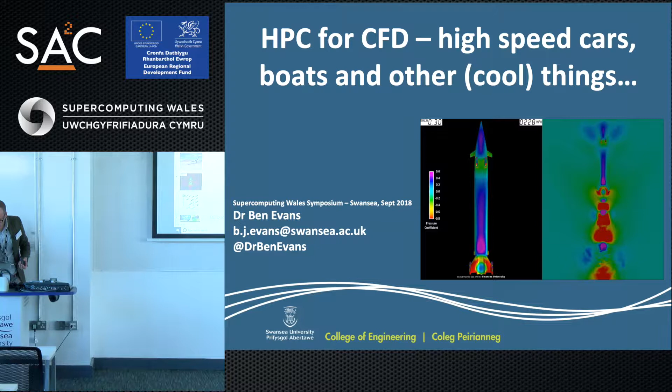So now we have Ben Evans, who is talking about HPC for CFD. Yeah, how are you? Hi. Good. Morning, everyone.

These guys from SA2C, by the way, they're really, really good. If you've not engaged with them at all, you should. I don't know why I'm advertising this, because the more people that engage with them, the more demand there's going to be on your time, inevitably. They've done some bits and bobs with some of the work that I've been doing, and over the last 6 months we've managed to get some of my code to do things I could have only dreamed of achieving myself, or it would have taken several PhD projects to get to the point where they're doing what they're doing now. So I do really recommend engaging with them.

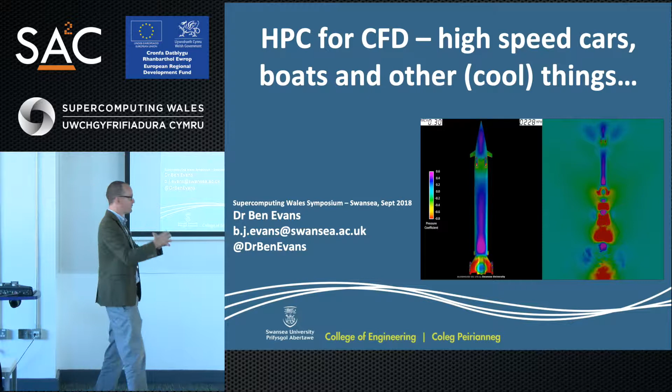You'll notice I added the word 'cool' into the talk title: High-speed cars, boats, and other cool things. I found preparing for this almost like a therapy session, because a lot of the work I do sometimes feels a little bit disparate, and I tried to bring it all together into one PowerPoint presentation, which was quite therapeutic. Then I looked back at all my slides and thought, you know what, some of the stuff I do is quite cool. So I added the word cool into the title.

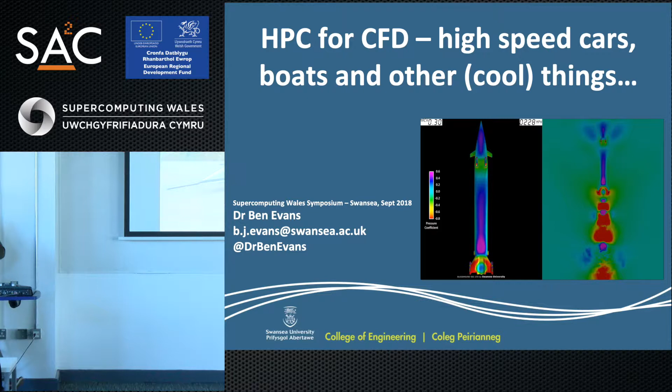This picture landed on my desk about a decade ago. I was wrapping up a PhD in computational fluid dynamics. The work I was doing then was looking at molecular descriptions of gas flows, mathematically via an equation called the Boltzmann equation, and trying to figure out if we could solve this using finite element methods. Honestly, if back then you'd asked me what HPC is, I wouldn't have really been able to answer that question. Jason Jones is smiling because he'd probably say I still couldn't answer that question.

But over the last decade, it's become obvious to me that I simply cannot do what I do without high-performance computing. This picture landed on my desk with a note attached to it. I was planning on leaving the university and going to get a proper job. There was a note asking me to go see my supervisor, Professor Ken Morgan.

It turned out that a chap called Richard Noble, an ex-land speed record holder, was the project director on the Thrust land speed record program, which developed the Thrust SSC car that holds the land speed record today. He got in touch and said, we're going to have another go at this—we're going to take a British land speed record car up to a target speed of 1,000 miles per hour. For the last decade this has been a joy, stroke the bane of my life, to work on.

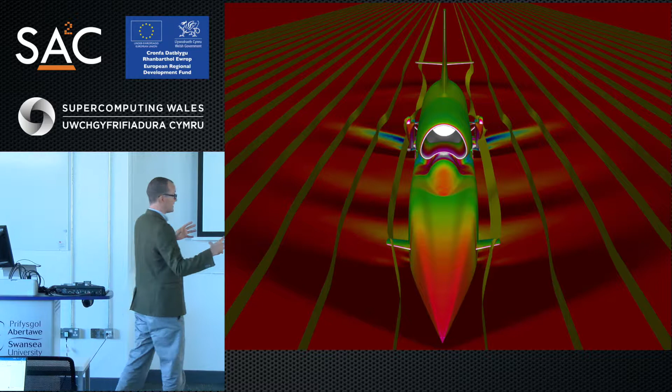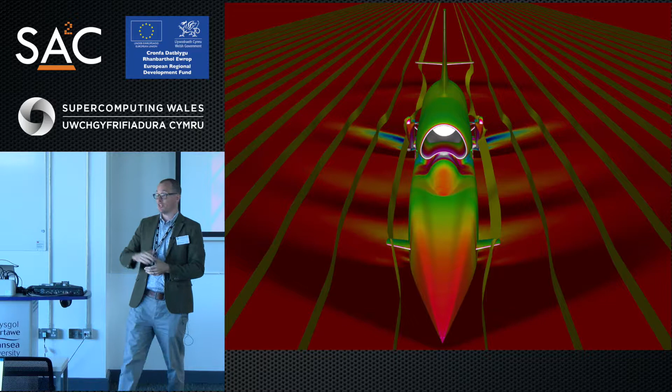The design for this car has been driven almost entirely using computational fluid dynamics. Whether a land speed record vehicle is successful is almost entirely driven by the aerodynamic forces acting on the vehicle. There are other things to consider, but to get to the external packaged shape of the vehicle—the external geometry that drives the aerodynamic response—you need to understand the aerodynamics: how much lift or downforce acts on the car, how that varies as a function of the vehicle's speed or Mach number, and how much drag will be acting on the car.

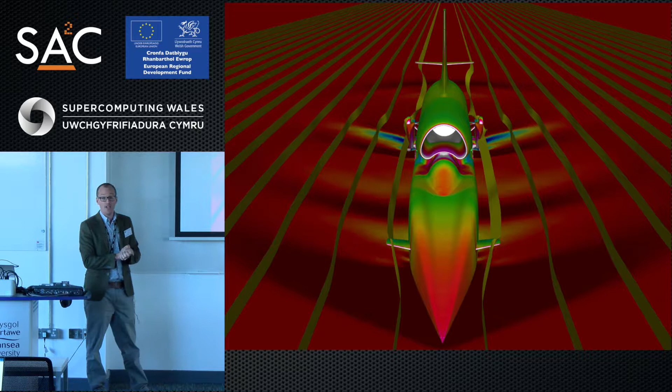We went through a process which started all the way back in late 2007. First, trying to answer the question: is it even physically possible to take a vehicle of this sort along the surface of the Earth at 1,000 miles an hour? Can that be done? And second, if it can be done, what shape should that vehicle look like?

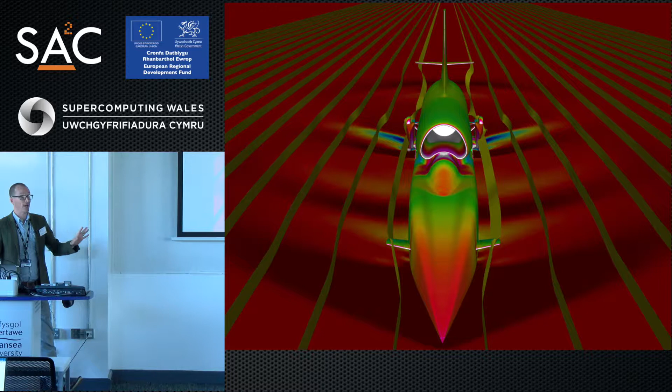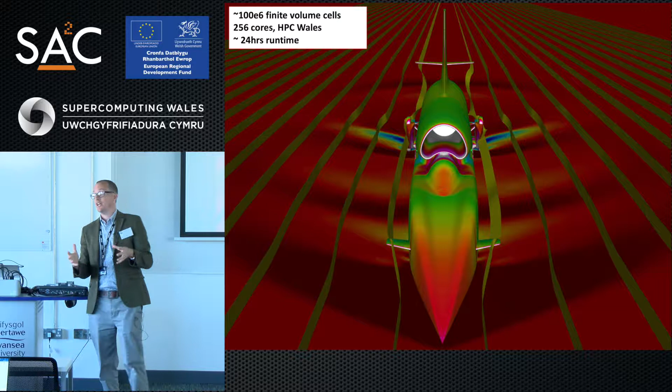That process was driven by CFD. I'm not going to put any equations up, just a few bits of stats since HPC people are interested in this kind of thing. The simulations we're running are RANS-based, so based on solution of the Navier-Stokes equations in their Reynolds average form. They're time averaged, which requires you to use turbulence models to understand what's happening at the subgrid scale and at temporal scales smaller than your time steps.

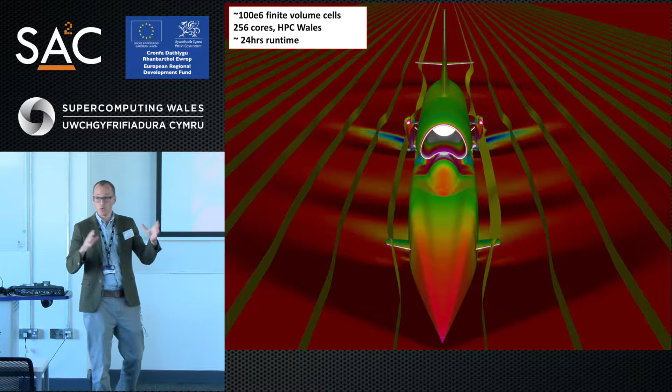To run a single steady-state CFD solution on a problem like this, on a grid size of the order of 100 million cells, would typically take about 24 hours to get to a steady, converged solution across 256 cores of the HPC Wales machine, as it was back when we were running these types of simulations. So there is no way we could have done what we did on Bloodhound without HPC.

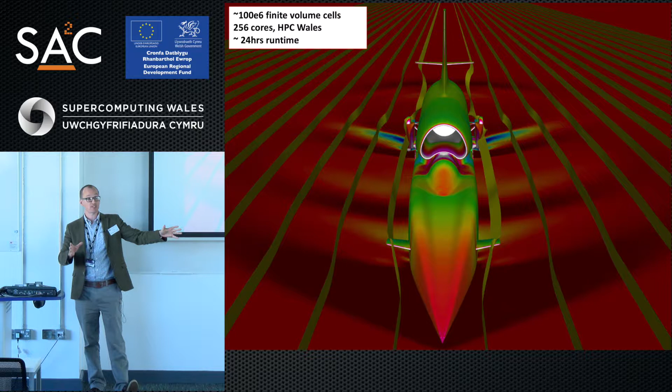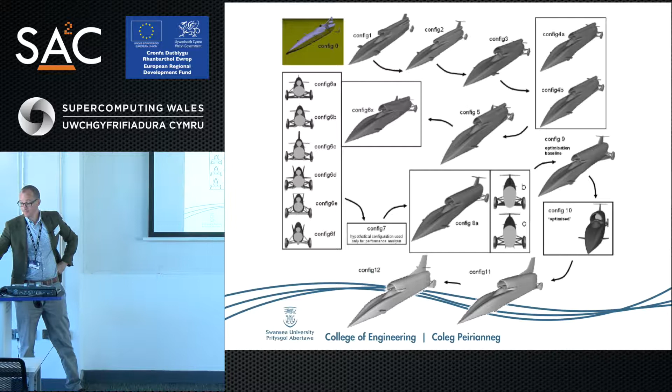And that's a single simulation of the car at a given Mach number, so a given set of free stream aerodynamic conditions. But we want to know how this car responds all the way down to, say, Mach 0.2, Mach 0.3, where it's traveling at maybe 200, 300 miles an hour, right up to 1,000 miles an hour. So what we do is we run a series of snapshots at different speeds to build up a picture of how the car behaves across the speed regime it's going to be running at. That information then feeds into the wider design cycle of the car.

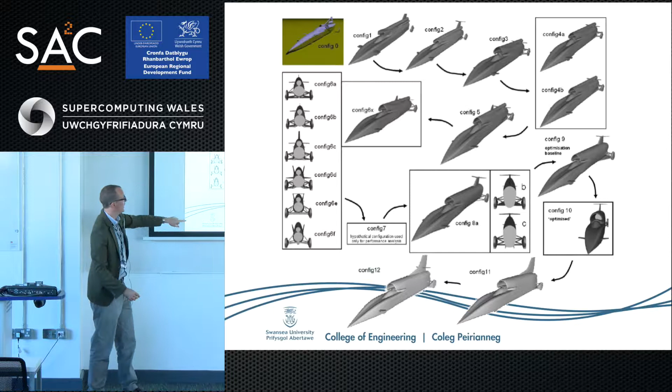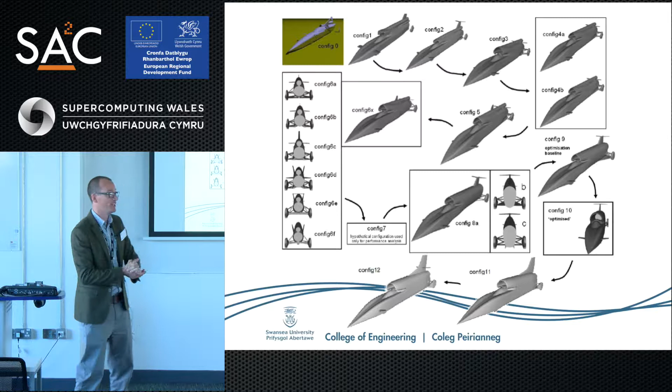So this is config 0, the first set of the geometry on which we ran the first set of CFD simulations a decade ago on that initial artist's impression of what the car should look like. It took us about 5 or 6 years to come round this loop and arrive at the car that we built, which is actually config 13. But Richard Noble has told me never to present a presentation where I tell him that the car we built was number 13, because some people get a bit funny about the number 13. So I always stop at config 12.

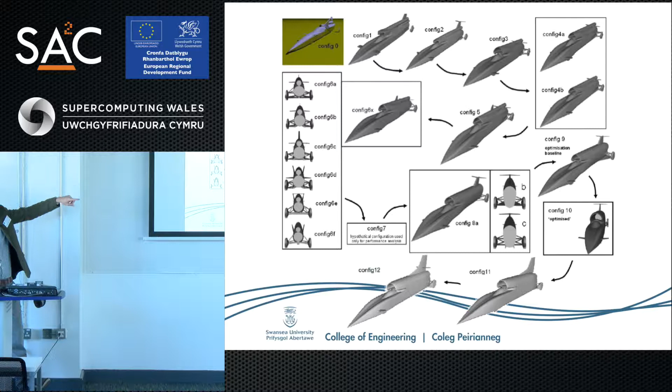Again, you can get an idea — at every point in this cycle, every time we change the car geometry, we're running maybe 20 or so of those 256-core, 24-hour simulations. A heck of a lot of HPC resources gone into getting us around this loop, and it took us about 5 or 6 years to get to that final design.

Once we'd nailed the external package of the car, we then started homing in on some other things that might have been of interest. One of the questions I was asked was: how are the air brakes on the car going to affect the flow downstream and the part of the car that sits downstream of these air brakes?

So just to give you an idea why we need the car to slow down — we're going to run this car on a 10-mile track. In the middle of the track, there's a mile where the average speed of the car will be measured, and we've got to get the car to average 1,000 miles an hour over that mile to get a 1,000 mile per hour record.

At 1,000 miles an hour, you're traveling a distance of a mile every 3.5 seconds. Imagine getting from here to somewhere a mile away — that will take you 3.5 seconds. Our track is 10 miles long, so at the end of this measured mile, where we're traveling at 1,000 miles an hour, we've got just under 5 miles to stop.

Actually getting the car to stop is every bit as challenging aerodynamically as getting the car fast in the first place. So we need braking systems — the drag of the car alone is not enough to get it to decelerate in that distance. So we open out these big barn door air brakes on the side of the car.

In a design meeting a few years ago, someone asked me: do you have any idea what the flow field looks like downstream of those doors? Now, of course, once you open big bluff bodies into flow like that, the flow you get behind them is really messy.

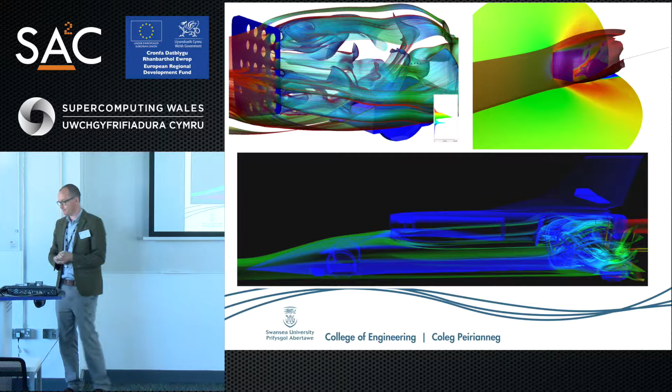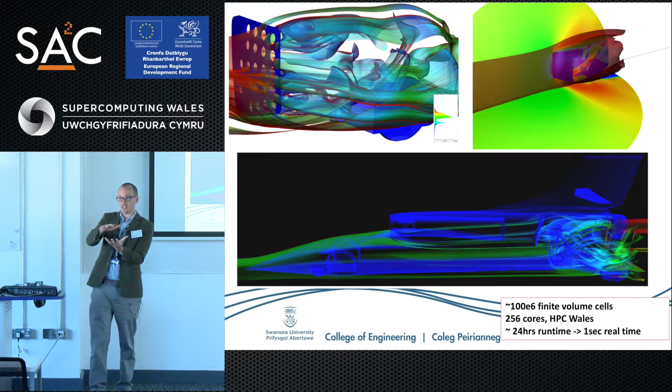They were interested in knowing what the vortex shedding frequency at various speeds of the car would be on those air brake doors. So we ran a set of simulations focusing in on just the air brake behavior. Again, a similar sized mesh, but this time running in real time, trying to pick up the time history rather than converge to a steady state. This is expensive, 256 cores. It took about 24 hours runtime to get about 1 second's worth of real time history at sufficient resolution to capture this vortex shedding.

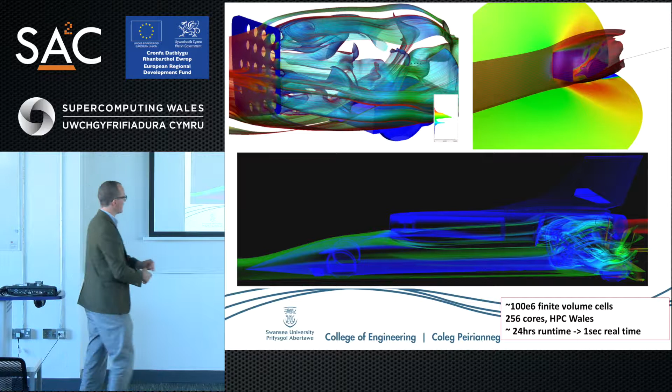I went back to the meeting and said the vortex shedding frequency of the air brakes as they first existed, just a solid door, is about 1 to 2 hertz typically. We turned to the structural engineers who designed the rear wheel suspension and fairing system and asked them roughly what's the resonant frequency of that system. They said 1 to 2 hertz. So we said, oh - I think we used a word I probably shouldn't say since this is being filmed. So we had to come up with a solution.

The solution eventually was simply to punch a load of holes in the air brakes. There was a small penalty in terms of how much drag they generated, but not as much as you might think considering how much less surface area there is now. What they ended up doing was instead of having very large, relatively low frequency vortices being shed from the air brakes, we ended up having lots of much smaller, but much higher frequency vortices being shed, which we hope is far enough away from the natural frequency of the rear wheel system not to shake it apart.

At the same time as all of this, I promised I'd tell some stories. So I was sat in a cafe down there, Callahan's. Is it still a thing, Callahan's? Yeah.

This is why I love universities. I was sat there drinking my coffee - it wasn't the drinking the coffee that's the reason I love working at universities - but someone came over to me from computer science and said, oh, over there's a guy I've been meaning for you to talk to for a long time, have you got a few minutes? So I said yeah, fine. And the guy's name was Matt Edmunds. Anybody know Matt Edmunds? He used to be a computer scientist, and then he saw the light and came over to engineering and worked with us.

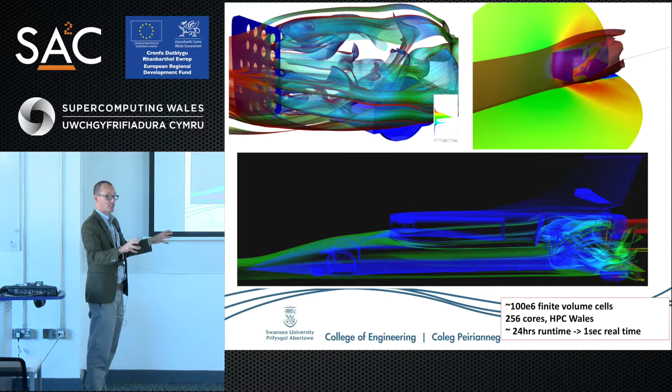He was doing a PhD on data visualization, and he'd been wanting for a long time to try out some of his techniques on CFD data sets. So he basically said, this is what I do, this is the data I would need, this is roughly the format I'd need it in, let's see what we can do. So I just sent him a download link to some of the data sets we'd recently run on this particular problem, and within an hour or so he was emailing me back pictures that looked like this, which I thought was really cool, because up until now generating flow visualization of my CFD data sets would be an incredibly manually intensive piece of work using software like ParaView or EnSight. You play around for ages trying to seed your streamlines or stream surfaces to pick up the phenomena you want. He had this capability to just load in a data set, look for the interesting features in it, and visualize it all automatically. We'll come back to that story later on.

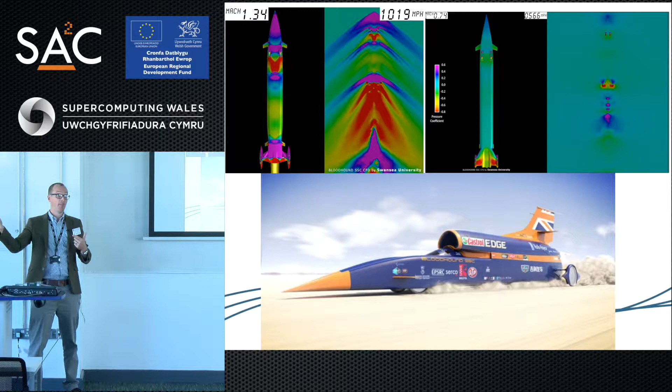So we're not just interested in what the air is doing to the car, but also what the air is doing to the ground that the car is rolling across. Thanks to Jason Jones, who produced these visualizations for me. What we've been doing as well is looking at the effect of, particularly when shock waves start being generated as we go through the transonic regime - by about Mach 0.8, 0.85 we start generating shock waves, which are these big purple things here - because what they found on the Thrust project was one of the problems they had is you've got to run the car back in the opposite direction, and it's the average of your 2 runs in opposite directions that gives you your land speed record.

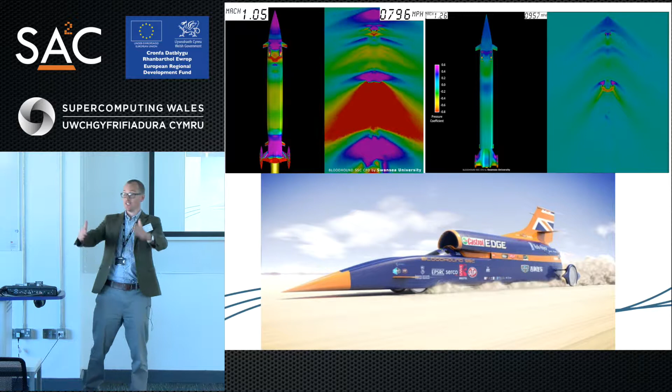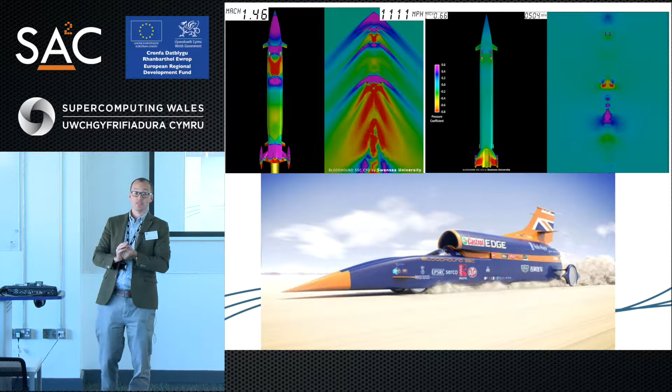The shock waves they were generating were actually pulverizing the surface that the car was running across, so by the time the car was running back in the opposite direction, the surface had been almost destroyed. And we're going to be running 30% faster than Thrust did. So we realized pretty early on this is going to be a big problem for us.

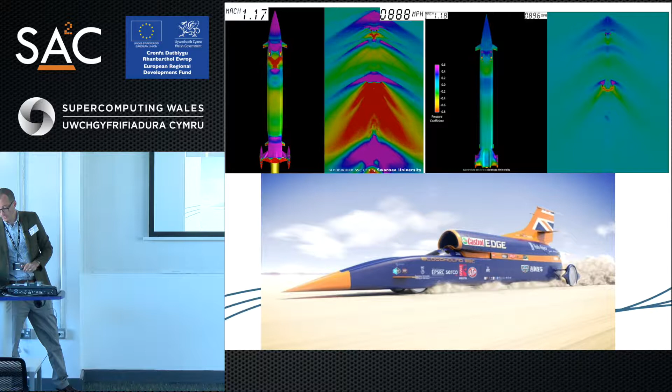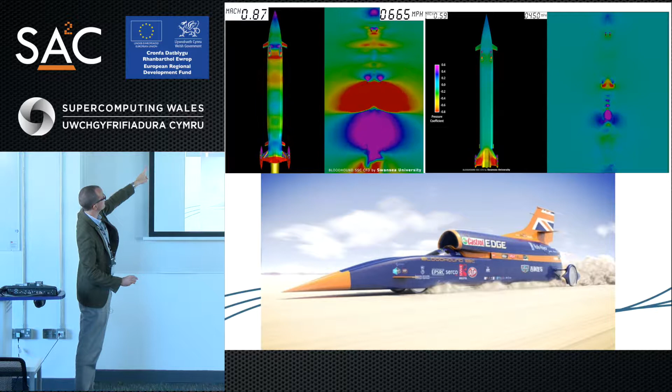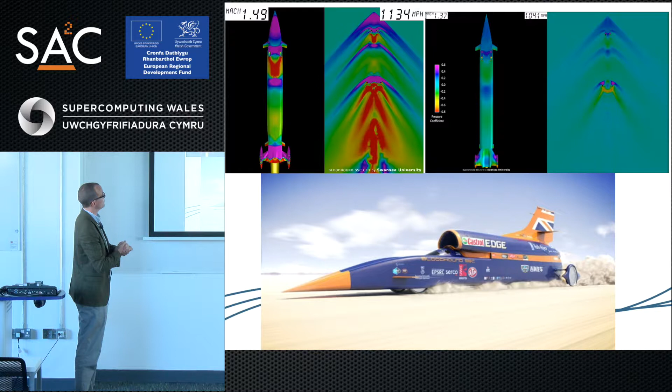So we specifically used design optimization techniques to get the underside of the car right. On the left-hand side is quite an early configuration of the car, the right-hand side is the current design, trying to minimize the impact of the pressure distribution generated by the aerodynamics on the ground plane. These are using the same pressure coefficient mappings, and you can see we did a pretty good job of minimizing the impact of the pressure distribution over the ground plane. This stuff down here, don't worry too much about that, because that's at a point where the grid has become too coarse to be accurately capturing what's going on.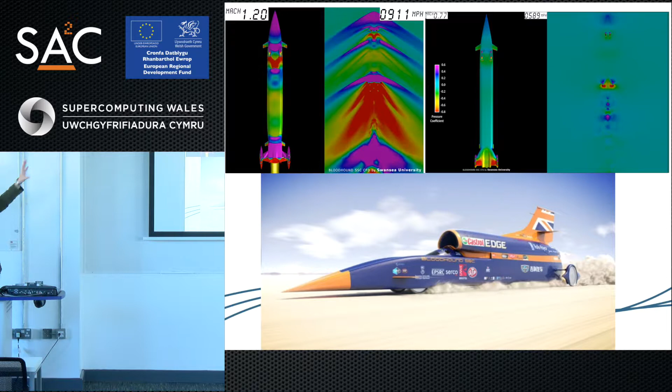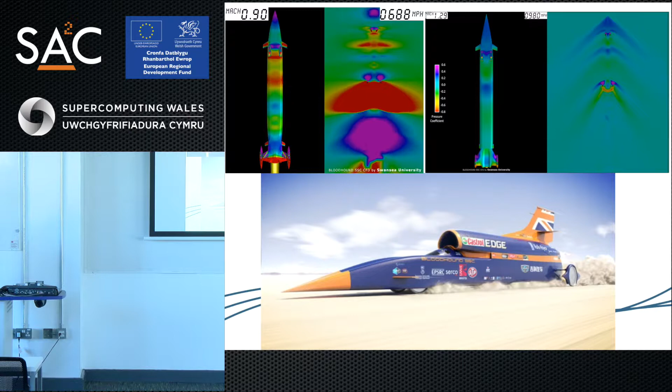Anyway, to cut a long story short, we ended up designing this car here. We built it over a period of about 18 months, and the build was finished towards the end of last year. So we thought it would be fun last year to take this to a UK runway and see what we could do. So let me just show you this video. I'm hoping we're going to get some audio, but yeah, we do.

So back in October 2017, we took the car to Newquay Airport, which is a military airfield, or an ex-military airfield, and it's got one of the longest runways that is relatively underutilised in the UK, which is why we went down there. Clear to roll, wind 2 o'clock, 5 knots.

I still can't decide whether watching this car rolling at 200 miles an hour gives me more confidence or makes me more nervous about trying to take it to 1,000 miles an hour. But we had a lot of fun that day.

There was a lot of conversation on the day. So we took the car, and I think the peak speed we got it up to was about 212 miles an hour. And there were a lot of people there going, yeah, hang on now, a Bugatti Veyron can go faster than that, and you could go out and buy one of those if you had enough money.

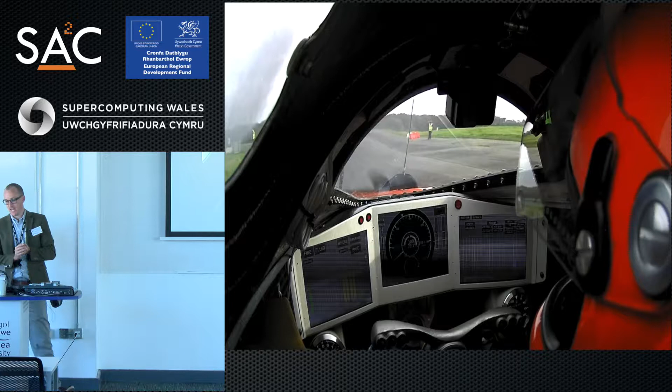The marine industry is probably a generation behind where the aerospace industry is in terms of implementing computational tools. They still design even extraordinarily expensive marine, like ocean-going liners, using kind of rules of thumb and engineers doing a bit of this and sticking something they've tried in a flow tank. There are people dabbling with CFD methods for hydrodynamic design, but it's nowhere near at the level of maturity that it is in aerospace. So we thought, well, this would be an interesting thing to have a go at.

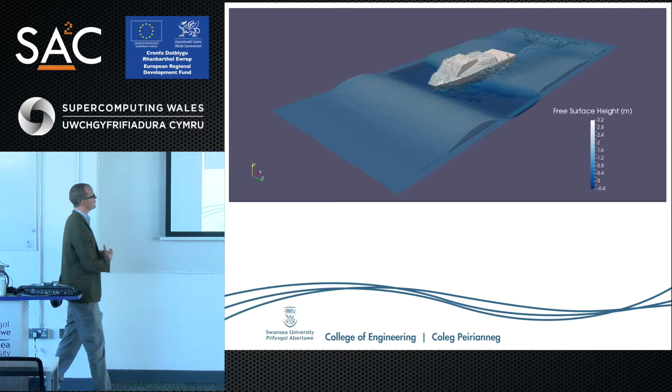We partnered up with a French naval design company based in Cannes in the south of France, which is quite nice when we get to go and visit them. We started looking at what kind of problems they were trying to solve, and whether we could solve these using computational tools and high-performance computing. They sponsored Jack, who is just rounding up his final year of a doctorate project.

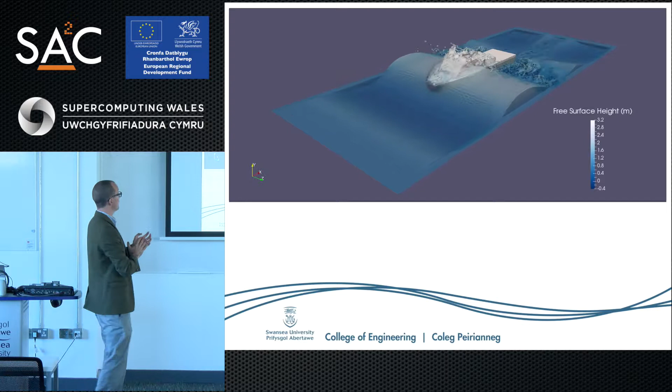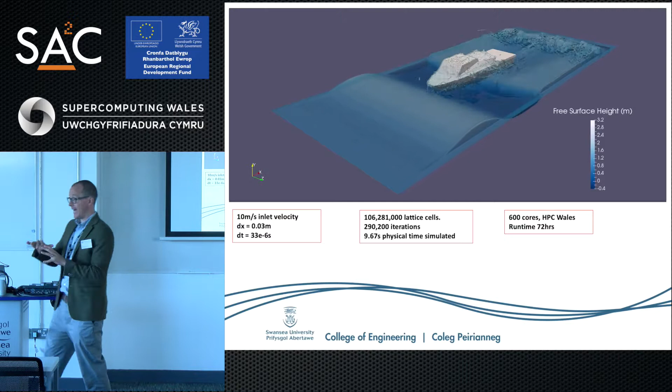So we started running simulations like this using a lattice Boltzmann technique. We started thinking about whether we could adapt the kind of Reynolds-averaged Navier-Stokes type CFD that we use for Bloodhound and aerodynamic analysis for this.

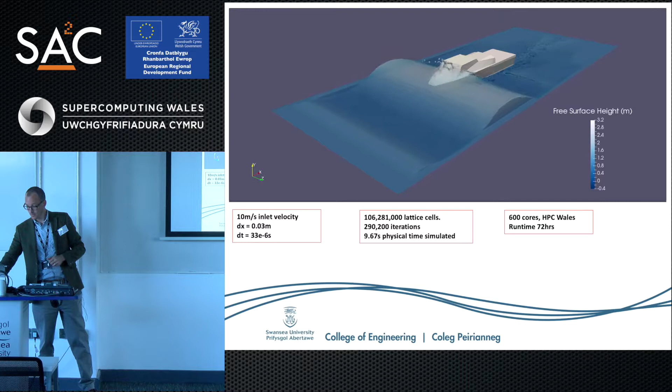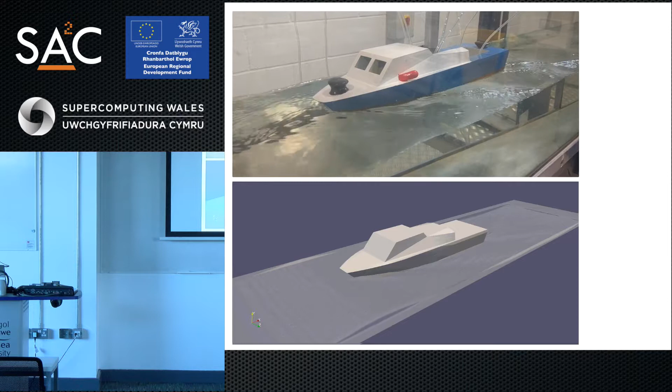But really, one of the big problems with hydrodynamics for marine craft is how do you track the free surface? That's a really challenging problem - first of all, how do you track where it is, and then how do you deal with it in a RANS environment, even if you can track it, particularly when it becomes extremely high fidelity, complex and evolving.

So we decided to move over to a technique known as a lattice Boltzmann technique, where essentially instead of solving for the traditional fluid properties like pressures, densities and bulk velocities, the thing you're solving for is a probability function - the probability of finding a molecule or a particle at a particular point in space with a given velocity. The lattice Boltzmann method then restricts the possible velocities these particles can be traveling at to align with the grid you're using. That's basically the idea behind it.

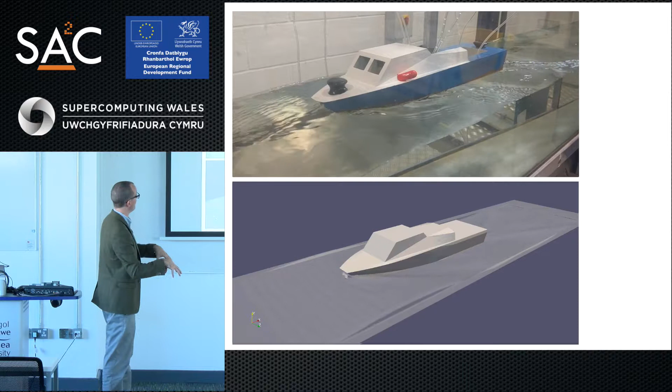We found that yes, we can solve these types of problems. We did some experimentation over in engineering where we stuck an equivalent model wired up with pressure tappings across the hull, to see if we could get the same kind of response that we saw in the flow tank as in the CFD model.

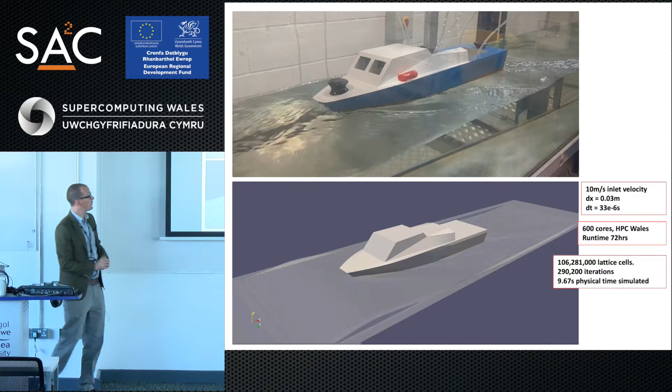But very quickly we realized this is expensive. In this case, to replicate this real-world flow tank example on a grid which is still relatively coarse - 3 centimeter grid size cells - to keep this scheme stable we ended up needing a time step of about 30 microseconds, 10 to the minus 6. So to simulate a reasonable amount of time, in this case 10 seconds, required almost 300,000 time steps, which on a grid of about 100 million cells took 72 hours of runtime partitioned across 600 cores of the HPC Wales system.

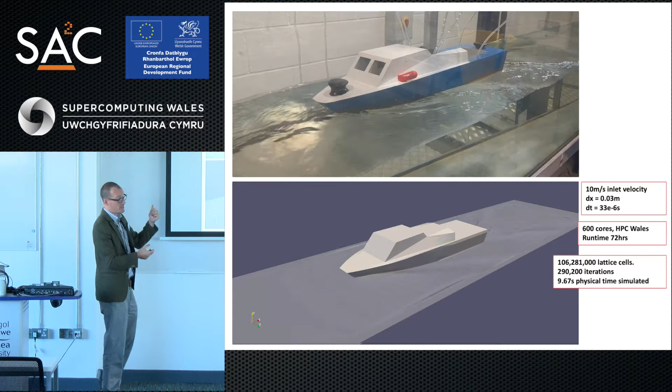So this is really expensive, and still one of the challenges of implementing hydrodynamic modeling into the marine design cycle is that running these types of models is really, really expensive. And if you're interested in capturing features like a high fidelity wake - one of the things the company were interested in, since they specialize in high speed marine craft, is how can we minimize the effect of the wake, or what effect does the wake have on craft traveling behind it - the kind of resolution you need makes the simulations really, really expensive.

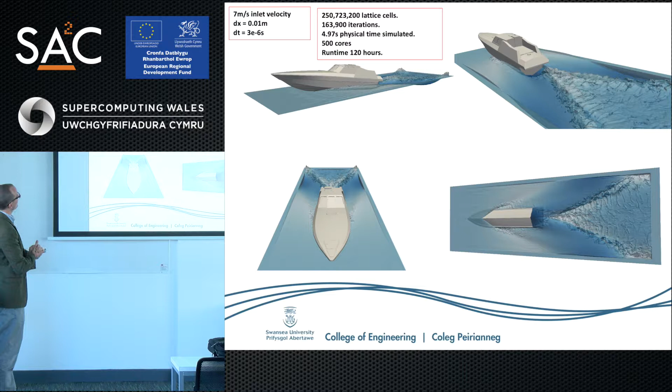So here the grid size reduced down to a centimetre, on a boat about 15 metres long. We ended up with a grid size of about 250 million cells, and again we're running there on 500 cores for 120 hours to give us just a few seconds snapshot of the response of this vessel.

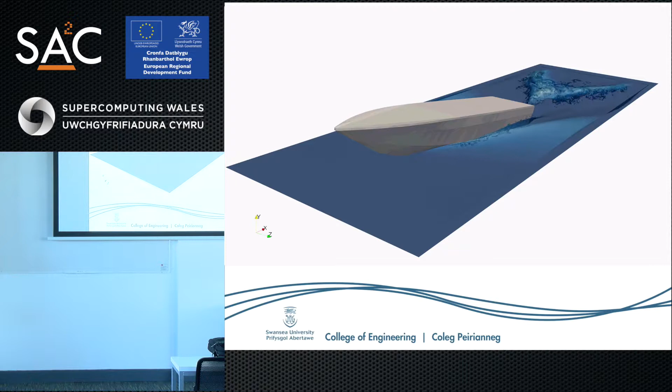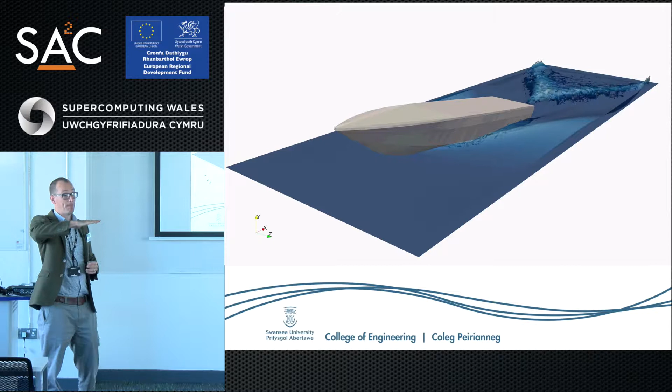One of the things they were particularly interested in - because up until now they've just used back of the envelope calculations embedded in a big fancy spreadsheet - was to figure out, for a given boat hull they're designing, what position the boat would sit at for a given flow speed.

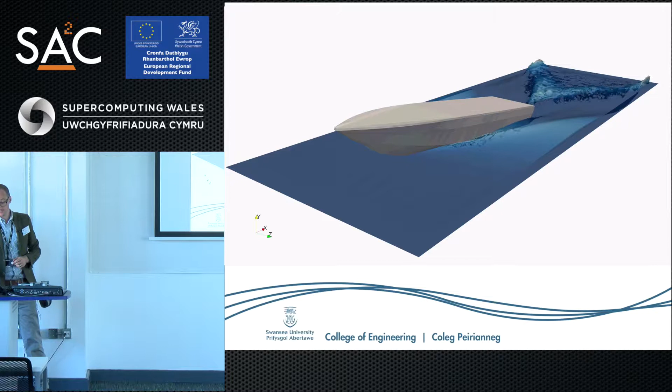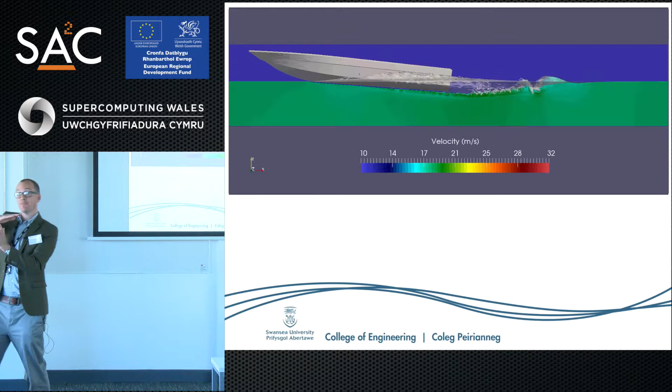So one of the problems they gave us early on was, could we predict where the boat would sit in the water if they gave us a hull form and told us the flow speed they wanted to run the boat at? Could we predict where the boat would sit in the water? That was our first test of whether we could get this right and do something useful for them.

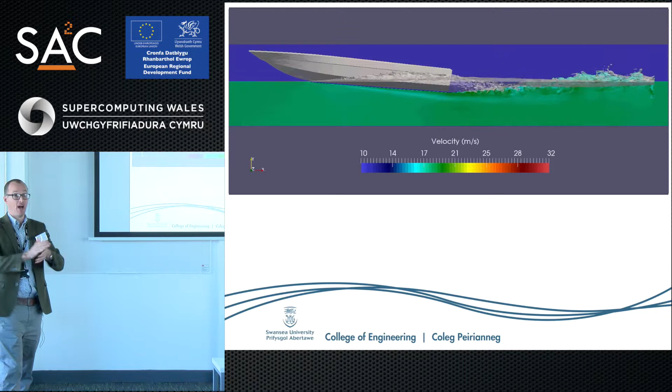And we got these pretty much spot on for them. When we sent our results back saying this is where we think the boat would sit in the water at this particular flow condition, it pretty much directly mapped to what they were predicting through their empirical methods.

At the same time as all of this was going on - we're okay, we've got 10 minutes left - in parallel with all of this, the lovely people at HPC Wales, as it was back then, and Fujitsu, decided that they were interested in sponsoring some research of mine.

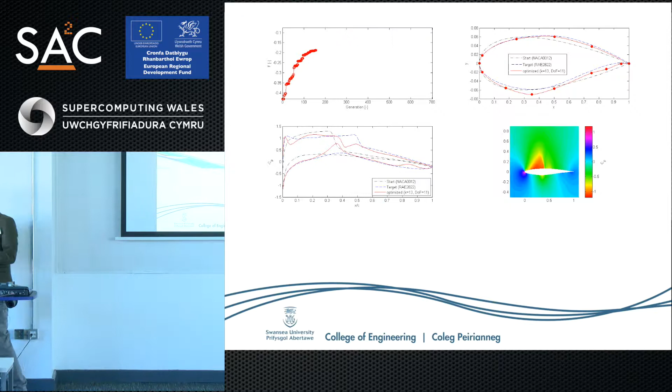So they sponsored a PhD student, and we decided we would look at a project in the area of computational optimization methods.

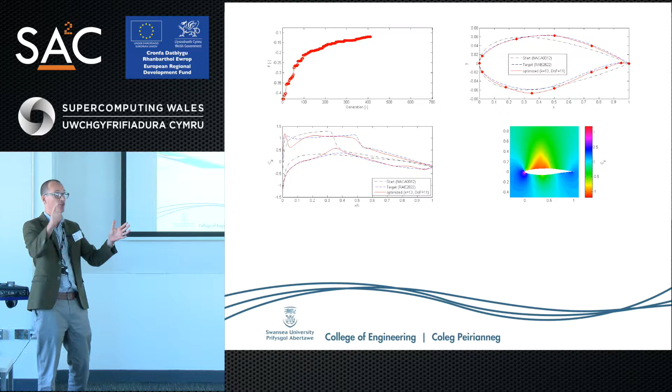One of the frustrations I'd had working on Bloodhound was the bottleneck in the design cycle that happens when you're going from a CAD-based geometry, a vehicle geometry in a CAD system exported as an IGES file or a step file, through to the CFD mesh. That was always the bit of the design loop that caused us headaches and a lot of manual intensive work.

So we decided we'd try to develop a scheme where, instead of going back to the CAD system every time to update the geometry once you've generated your initial mesh, you would just mold the mesh. So you would actually use the mesh itself as the parameterization method for the design optimization.

So I'm going to run this. I'm going to just stop it here.

So we did some work with a PhD student who I was really hoping would stay here and do a postdoc, and then he realized that Airbus would pay him a lot more money, so he's gone to work for Airbus. And we started solving these types of problems, partly because they're difficult.

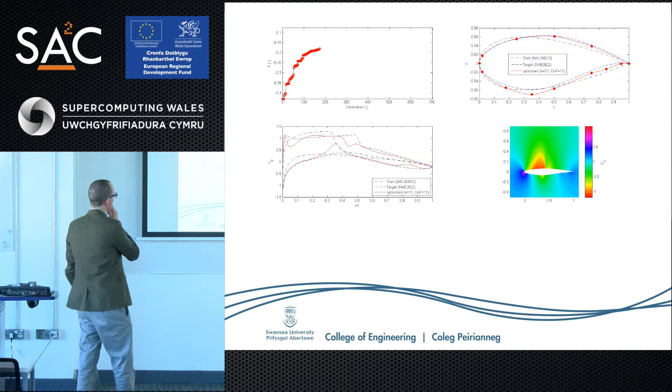This is a design of a transonic aerofoil, in 2D. What we're trying to do here is, starting with a fairly generic airfoil shape, what's called a NACA 0012, which is a symmetric aerofoil, we are trying to get the optimizer to design an aerofoil that we already know exists by giving it the known pressure distribution over that aerofoil. So it's trying to change the geometry of the aerofoil in the direction of a known solution.

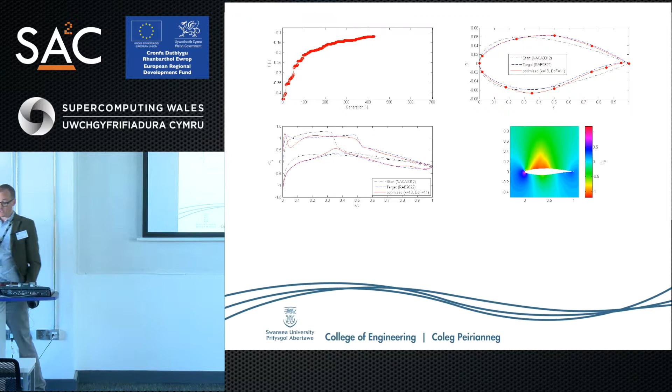But to do this in the transonic aerodynamic regime is really difficult because of how sensitive transonic aerodynamics is in terms of positions of standing shock waves and instability of CFD solutions in this regime.

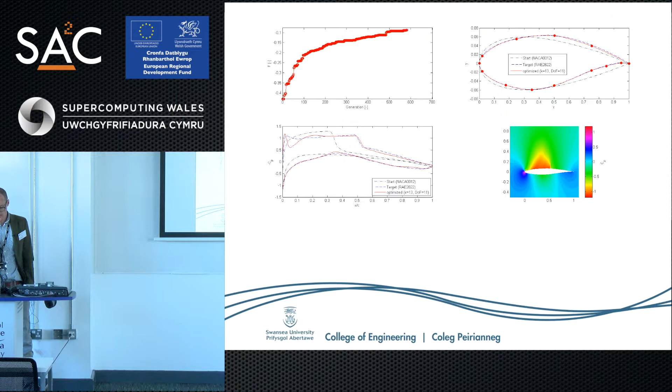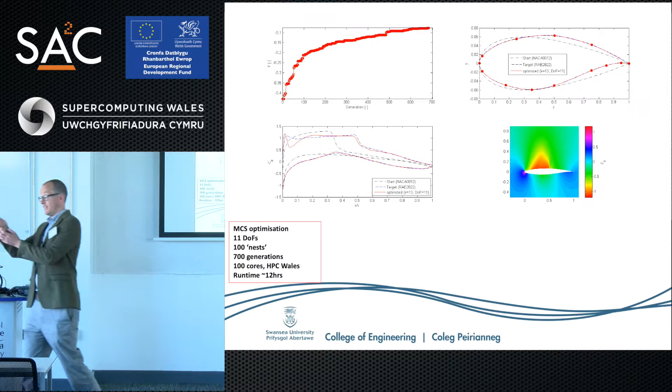So this is what happened as the optimizer was evolving. This is a case where we were running what's known as evolutionary optimization. So rather than have a single solution at each iteration that gets modified, we run a family of designs, in this case 100 what we call nests in the language of the particular optimizer we're using. So there are 100 designs being tested at every iteration. They're being ordered into the best designs and the worst designs. Interbred is the language often used to spawn new designs in the next generation.

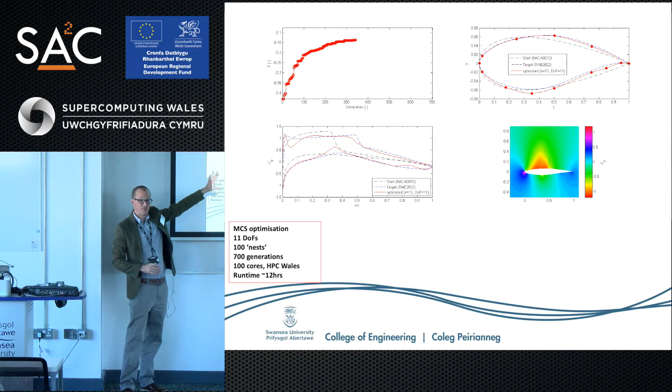It took about 700 generations for the optimizer to get pretty close to the target geometry. This sounds like a fairly simple problem—it's a 2D optimization case, 11 degrees of freedom.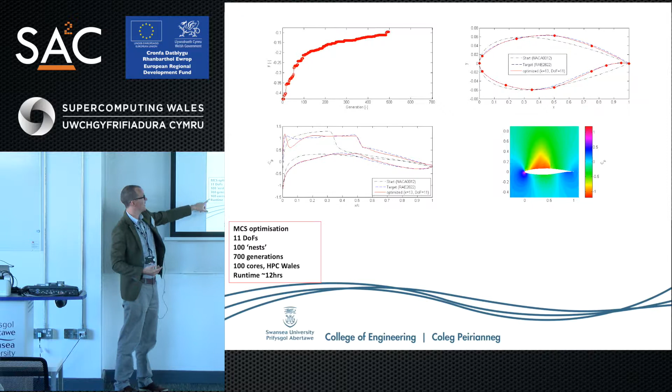The individual CFD solutions here will only take a few minutes to run on a single core. But because we're using evolutionary optimization with lots of agents and many generations, this actually ended up taking 12 hours to run on 100 cores of an HPC system.

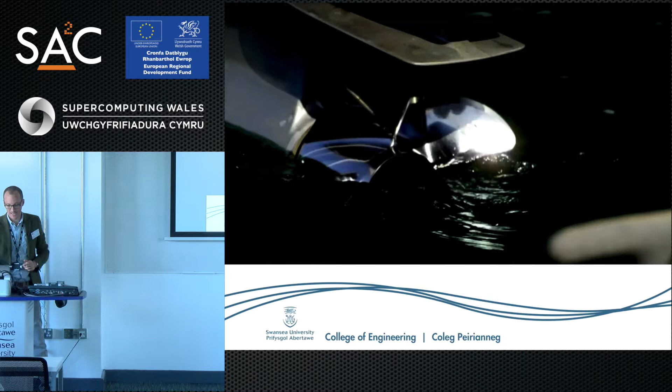So to bring these threads back together, I'm going to show you this. A couple of years into the project with Jack, the company down in France we'd been working with doing hydrodynamic modeling, came to us and said one of the things they'd really like to do is get into XCAT racing. Has anybody come across XCAT racing?

It's flipping nuts. Like, yeah, it's proper nuts. This is like the Formula One of powerboat racing, okay? You've got to be a little bit crazy to get in one of these boats, I think.

So, for whoever's editing the video, this next slide is the sensitive bit that we're not allowed to show, okay? And you're not allowed to tweet this stuff, because nobody knows they're working on this.

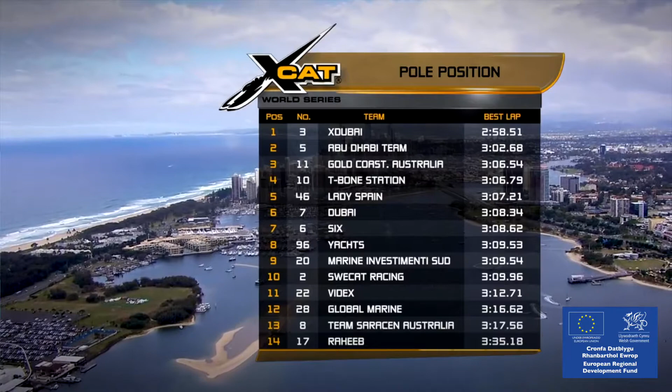So they said to us, could you help us design an XCAT boat that we want to enter into the next series of XCAT races, which will happen next year? And we said, yeah, fine, what's the problem? And they said, basically, this is all about drag reduction. Everything in XCAT racing is about how do you minimize the drag.

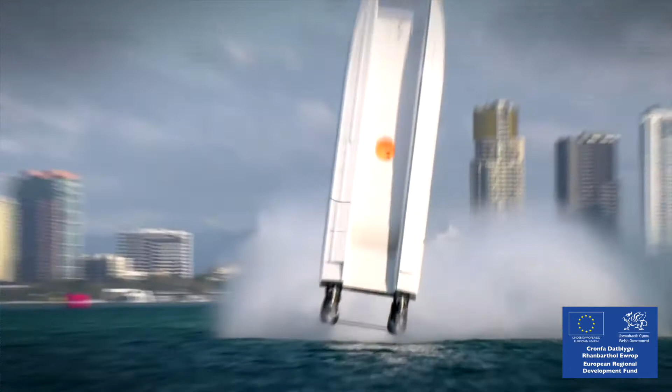So we started looking at this from a hydrodynamic point of view, like what you can do to the hulls to try and minimize the hydrodynamic drag. But it pretty quickly became clear that the solution to drag minimization on an XCAT boat is basically how high can you get the boat to ride in the water. The more the boat you can get out of the water, the lower the drag. And we quickly realized that then became an aerodynamic problem, as you can probably see from these—these are almost low-flying aircraft rather than boats.

So they asked us to design the aerodynamics of the tunnel that the air flows through between the two sponsons on the catamaran in order to maximize lift. This is an interesting optimization problem for an aerodynamicist, because usually what you're trying to do is maximize lift whilst minimizing aerodynamic drag. But in this problem they said we don't care about aerodynamic drag - it's so small compared to the hydrodynamic drag. Any additional lift you generate will lift the boat out of the water, and the drag reduction will swamp any additional aerodynamic drag penalty.

So at that time it was quite convenient - David was coming to the end of his PhD in aerodynamic optimization. He said, well actually we've got a tool for doing aerodynamic optimization. Now, Mark was directly referring to me when he said you'll find you have a PhD student who writes some code and then it sits somewhere for a couple of years, and you go and run it and somehow some bugs have crept into it. We found exactly that was the case here, because we hadn't controlled the code development in any meaningful way.

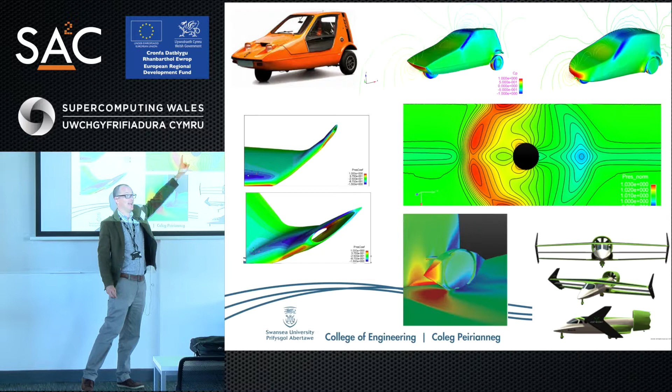It turns out that it's still a really difficult thing to do, to predict the drag acting on that, as a function of Reynolds number or Knudsen number of the flow, the degree of rarefaction of the flow. We had a go at doing this, but it was really expensive because it's based on a solution of the Boltzmann equation, which is inherently expensive.

I'd had ideas about how to better parallelize this for years, but just never managed to get the funding or the right PhD students to help me work on that. Mark came along and said, well, we've got RSEs now who help people like you do exactly that. We know the code isn't parallelized particularly well. And Michele came along and worked for a bit of time on this.

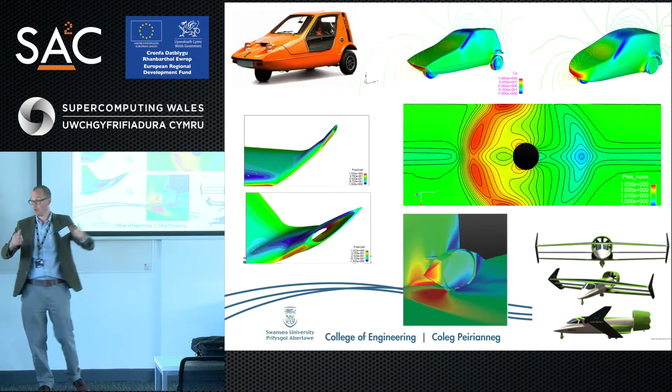We've now got a version of this code that used to scale up to about 16 cores, and now it will scale up to many hundreds of cores, which basically opens up a whole new array of things I can do.

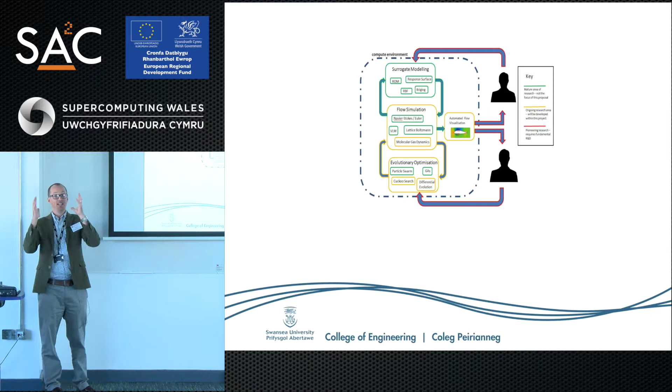To give you an idea of where this is going in the future, one of the things that's dawned on me working with engineers in industry on aerodynamic and hydrodynamic design is there seem to be two schools of thought. One camp puts all their eggs in computational optimization methods - they give their problem to a computer and say, tell me what the design should look like. Then there's another school of engineers who say, show me the CFD results, we'll sit down around a table with a PowerPoint presentation and discuss the implications.

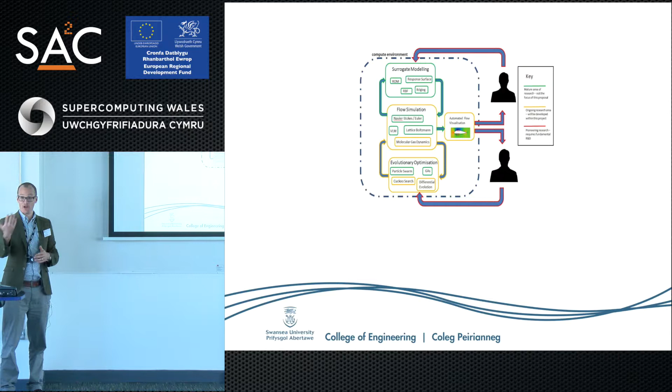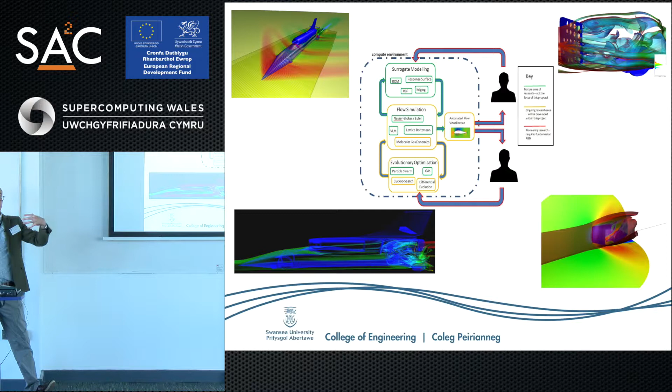Then we'll sit down at a CAD desk with someone, change the design, and try it all again. So I've got a project in its tentative stages where we're trying to merge those two ideas - bringing the human into the computational optimization loop.

As a computational optimizer is running - and these things can run for days and days - what if a human designer could drip feed his thoughts and influences into that process in real time? One of the tools that will allow us to unlock this, I think, is some of the automatic data visualization work that computer scientists here can do.

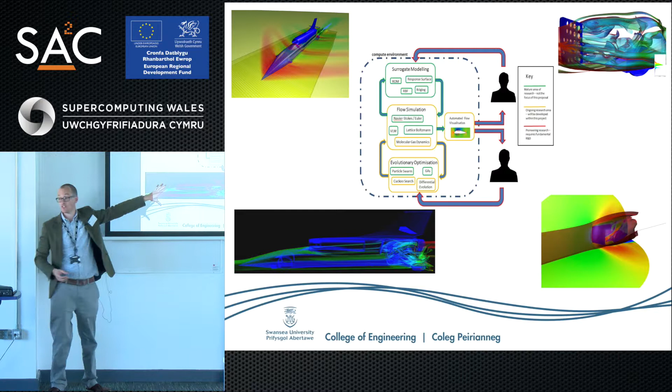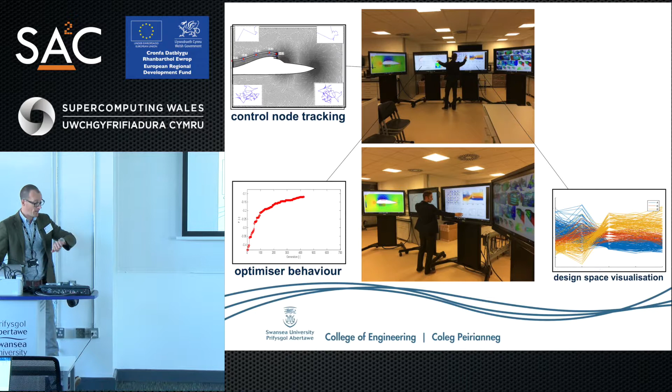These are some ideas that I've been working on and will continue to work on over the next few years. So I promised I would just show you pictures, but just to prove that I do also do some proper work...

On my final thank you slide, I'm just going to prove to you that we did publish some of this stuff as well and do the proper job of an academic. So thank you very much for listening.

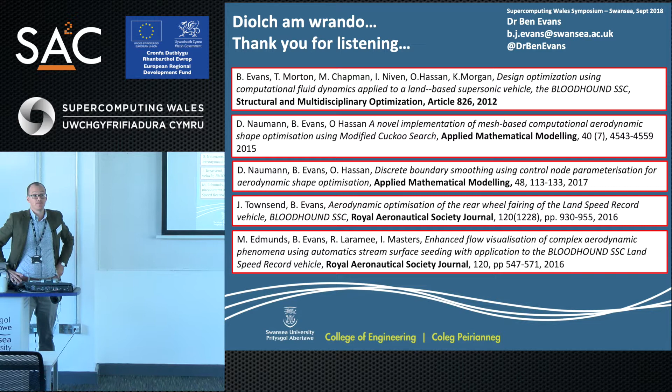So I was wondering, coming from working currently on structural mechanics and thermal mechanics - whenever you optimize those kinds of things, quite often you end up with biomimicry, which is a good way of evolving an optimized structure. Why within fluids are you not getting that? Are your constraints so much that you're not getting to that point, or is it something different?

Yeah, I think it's a really interesting question and something I'd love to explore. I think largely the answer is that the constraints the industry places on what you're allowed to do force you down a particular route. Like an aeroplane looks the way it does, not necessarily because it's the best aerodynamic shape - it's because that's how we built airplanes. There are good reasons for that: pressurizing a long tube is easier than pressurizing something that looks more like a bird.

But one of the things I'd love to throw these tools at in the future is constraint-free optimization - you don't give it any hint at what the thing should look like. You say, optimize the lift to drag ratio of this body, I'll give you a sphere, no constraint, and see what you get. You'd like to think you get something that looks a bit like a bird. But everything I've done is so industry focused - if I said to them, here's the plane I want you to build, and it looks like a bird, they would just laugh. But yeah, it's a good point.

So what happened? Did the Bloodhound set the speed record? No, not yet, I wish it had. We're still plugging away. We were hoping to take the car to South Africa this year for the high-speed testing, but we're in negotiations with sponsors who have competing demands on what they want to get out of it. So it looks like it'll be spring next year that we take the car to South Africa.